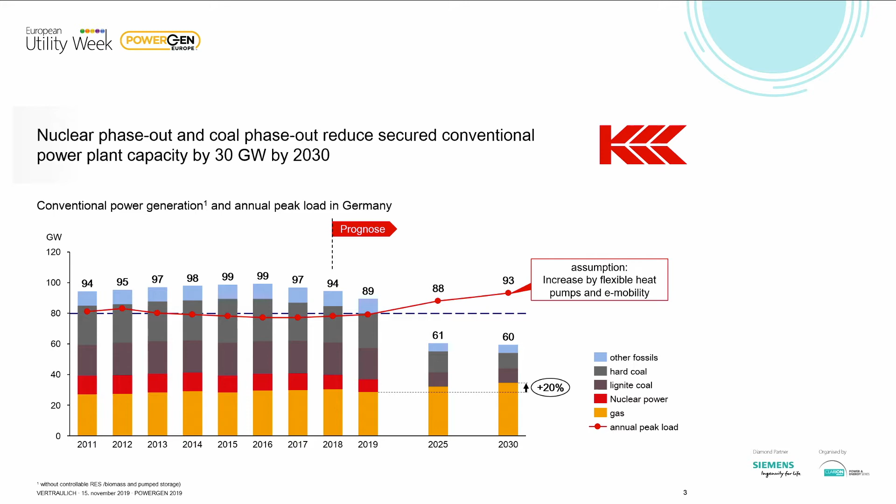As you know, we now have a law in Germany with a so-called bidding process for the hard coal power plants for the next, I think, 2 or 5 years, where 4 gigawatts per year will go out of the market. And the hard coal and lignite coal power plants will end. The last phase-out will be in 2035 or 2038.

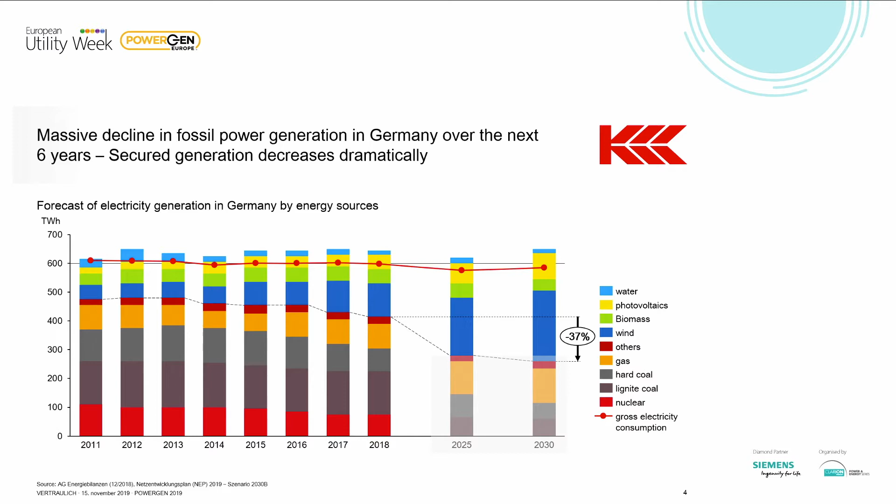So secured power is going out of the energy market, and the aim is to fill this gap of secured power by wind, biomass, and photovoltaics. And keep in mind, wind and photovoltaic is not secured power, but we want to install from 2018 to 2030 more than double of wind and photovoltaics. So at the end we have more than 200 gigawatts connected to the electricity grid, and this is more than double the peak load we have in the 2030s, about 90 gigawatts.

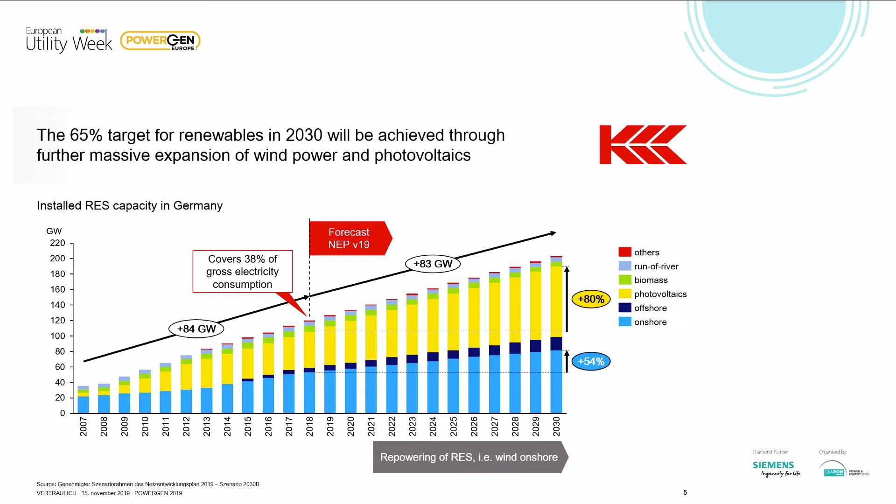And on the windy and cold days in January 2017, for a few days 55% of our load could be supplied by renewable energies. But 10 days later, at the end of January, only 10% of the supply is fulfilled by renewable energies. And you can imagine, without any wind and without any sun, you can double or triple the renewable energies; at the end we have no electricity out of this. So this is the challenge we have.

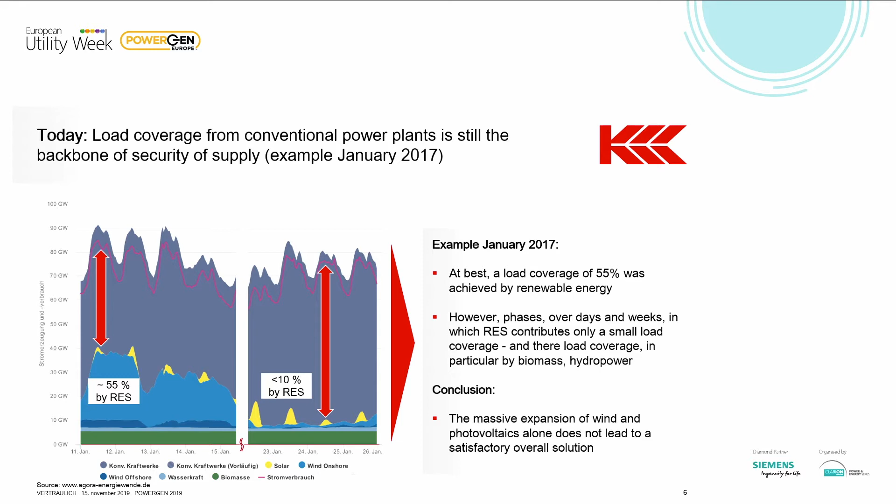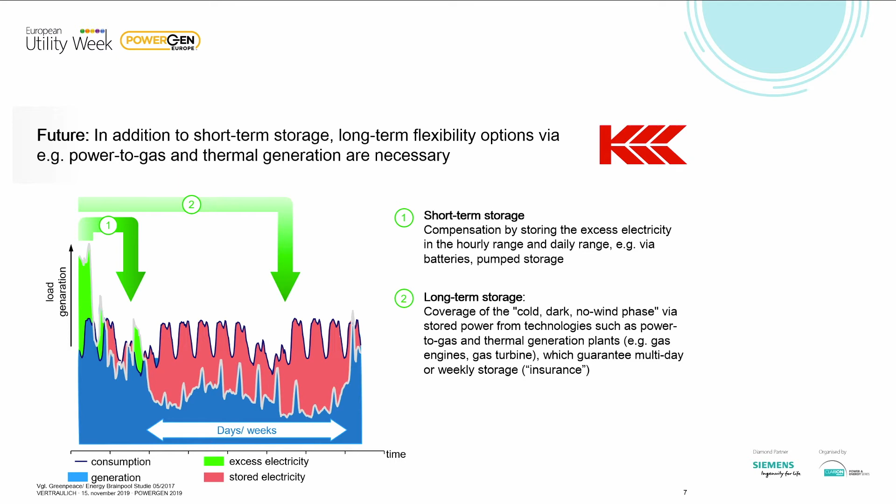And as mentioned before, the solution must be to put this excess electricity into storage. The first thing will be short-term storage, compensating by batteries or pumped storage, and long-term storage, which covers days, weeks, or months. Long-term storage has to take over for the cold, no-wind phase, and this could be, as mentioned before, gas turbines or power-to-X or power-to-gas, which would be at the end the insurance for weekly or longer storage.

To imagine what storage we have today in Germany: if you put together all the electricity storage, the household batteries and also the old pumped storage we have in Germany, we have only 34 minutes of storage for a normal cold winter day.

If you put 4 million cars into this system, you get compensated about three and a half hours on a cold winter day. And the only infrastructure we have in Germany is the gas net with its caverns, which make it possible to store energy for about 3 months. So why should we not take this infrastructure for the next decades, store some biofuels and power-to-X, and take some gas turbines or gas engines to ensure the power supply in Germany?

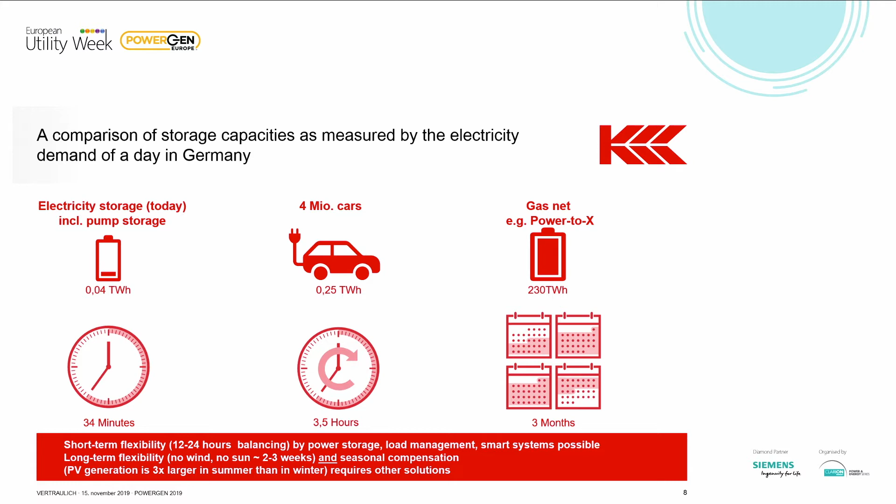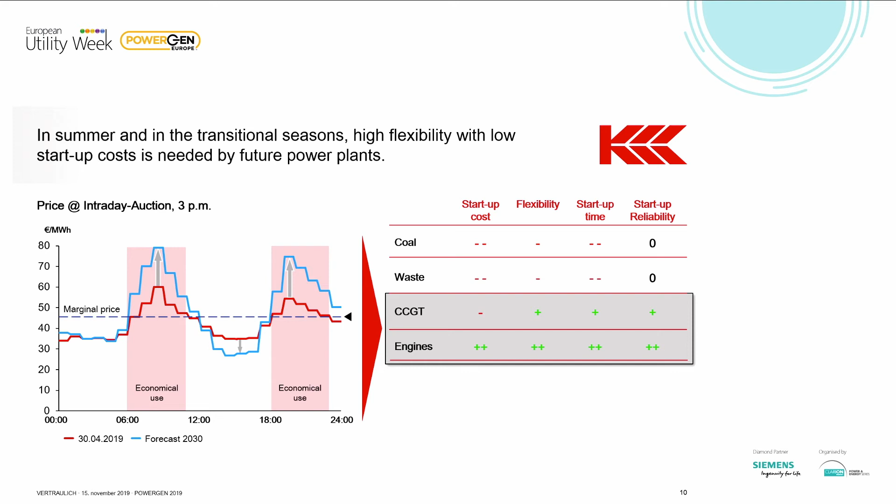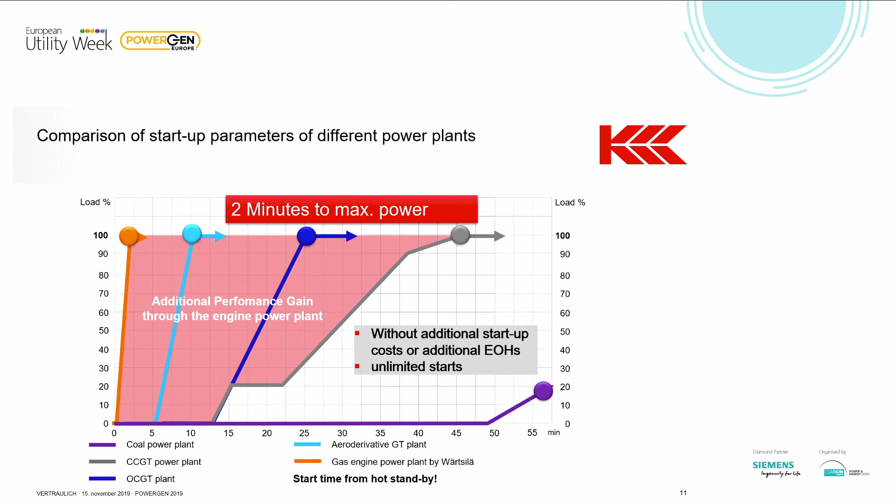As we see, in the future we will have more than 200 starts per year for such a machine, and this could only be done, from our perspective, with gas engines, because open gas turbines are too expensive in maintenance.

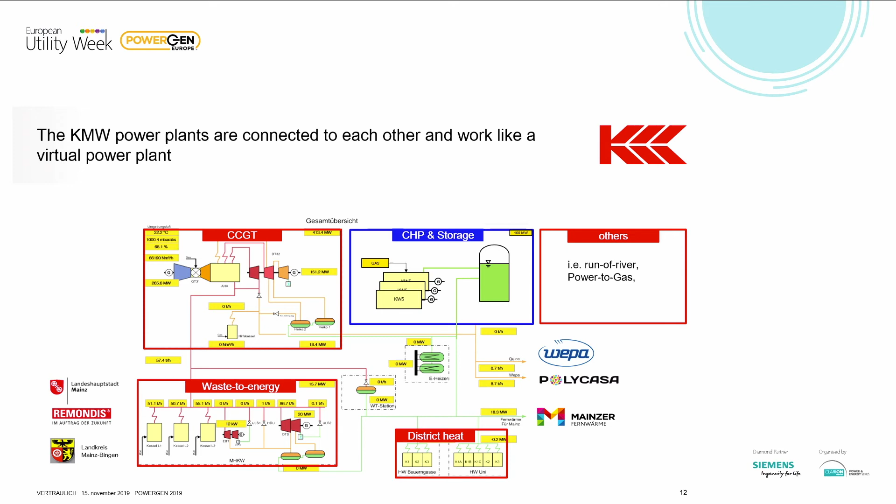Switching to our portfolio, we have now built up together with Wärtsilä a so-called CHP gas engine plant with storage. This fits in our portfolio with a CCGT gas turbine of 420 megawatts and a waste-to-energy power plant, serving our customers with district heat and also steam. Therefore, we have built this 100 million euro new combined heat and power plant with modular heat storage systems, because heat storage is needed with a ramp-up time of 2 minutes minimum. We have the heat after 5 minutes, and you have to store it in a so-called heat storage.

The gas engines are 10 times 10 megawatts with an electric efficiency of more than 45%, maybe more. We look at Wärtsilä. And the fuel conversion efficiency is about 85%. The heat storage has a 750 megawatt hour storage capacity with a temperature level of around 120 degrees and an output load fitting with the motors of 100 megawatt input and output load.

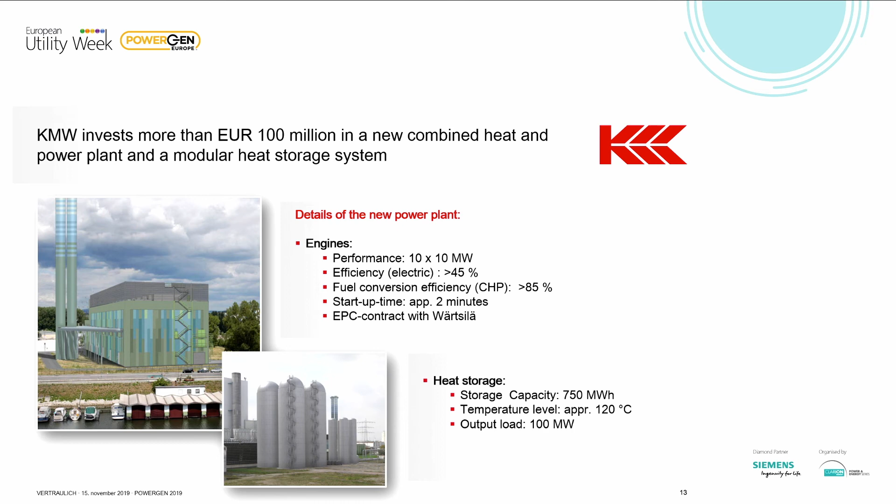How does it look? This is a picture made days before. You see it's ready. In the end it's not an engine, it's a whole power plant. On the roof you see the radiator areas for when we are not running the machines in CHP mode. So we can run it in electricity mode or in CHP mode. And it's going to have its COD in the first quarter of 2020, we hope so, and then run the machines with full power.

Looking inside a cell, how is it arranged inside? A cell has 2 motors. This is to get the best compromise between having a good maintenance concept and the economical value of the gas motors. And therefore we put only 2 motors in one cell. And this will be the next future.

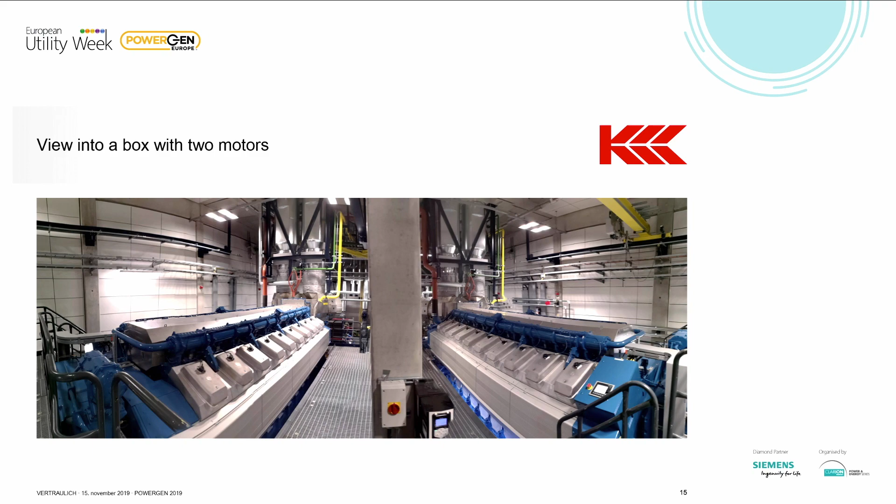And for the future, I would say today we normally have the production, then the transportation by the TSO and DSO, and the consumption. But in the future, our motors will provide smart integration of renewable energy as a service, because they are highly flexible, have low startup costs and reliable startup. So if the renewable energies are not there, we can start up in 2 minutes and compensate the amount which the renewables are not providing to the market.

But we also need the so-called aggregators and automated sector coupling with all these things: the conventional power plant, smart grid and renewable energies in the future.